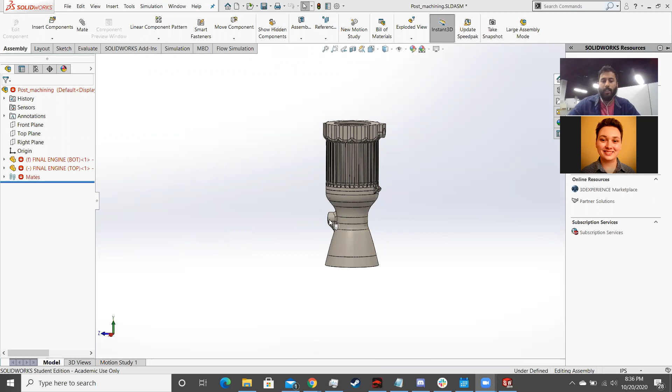Screen share that. So we're going to just run through how to do the most basic SolidWorks for the engines we're designing today. This is not what we're doing today. This is actually the regen engine itself. But eventually, in the next week or two, we're going to start getting to something that looks a little more like this with the nice nozzle curves and everything.

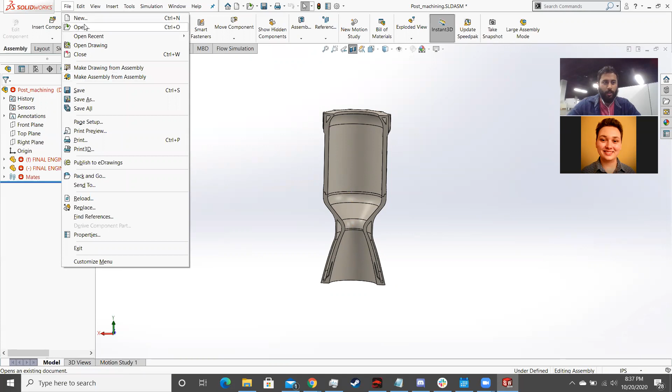But for today, what we're going to do is make a new part. So file, new part, all right. And hope that SolidWorks doesn't crash, because Zoom and SolidWorks running at the same time doesn't make this too happy. Close the other one.

First thing we're going to do is make a new sketch. Real quick, which units? I'm going to assume we're using meter, kilogram, second? Yes. Okay. And then dimension standard, just ANSI? Yep. Cool. Don't worry about it too much, because you can just type in whatever units you want, and it'll auto-convert. For example, I usually leave mine in IPS, inch pound seconds, just because it's easier to tell what's going on. But I'm going to put all my units in meters.

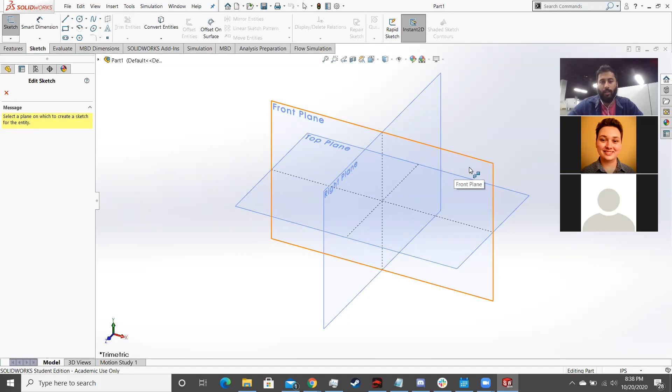So very first thing we're going to do is literally just draw a line here. We're going to click on that, say infinite line.

In case anybody knows the answer, is there a way to have SolidWorks not be awful on a second monitor? Nope. Gotcha. You can have two monitors running, but if you have it stretched between, like running on both monitors at once, it doesn't have a good time. Yes.

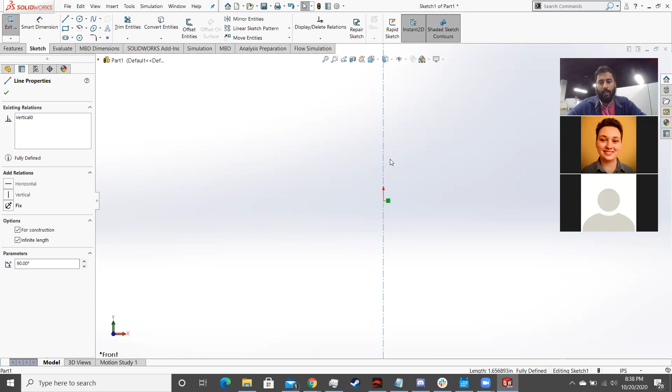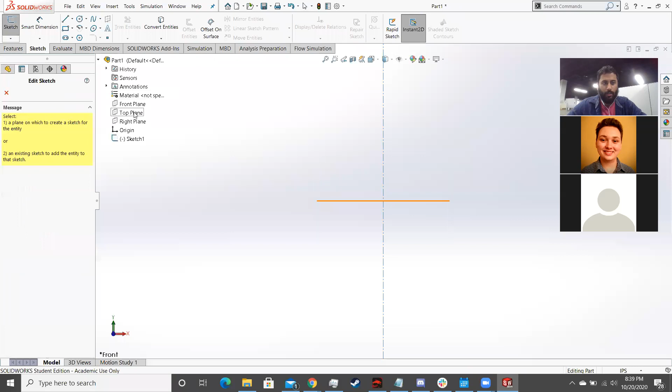Yeah, so first thing is just make an infinitely long line and have for construction checked off. Exit sketch, that's done. Then we are going to go back, make a new sketch again. It's going to ask us what we want to do it on. I'm going to drop down here, say the front plane again. What we're going to do now is kind of just blindly sketch something that looks like what the engine will look like, making sure it's kind of a closed body.

Now this looks nothing like what the engine will actually look like yet, but the kind of shape is there. I'm going to go in, make this be horizontal. Everything else kind of auto-completed to be the right vertical or horizontal. Before I go to actually set the radius on anything with length, I'm going to set the angle on the diverging section of the nozzle, which, as Jackson discussed last week, is going to be 15 degrees.

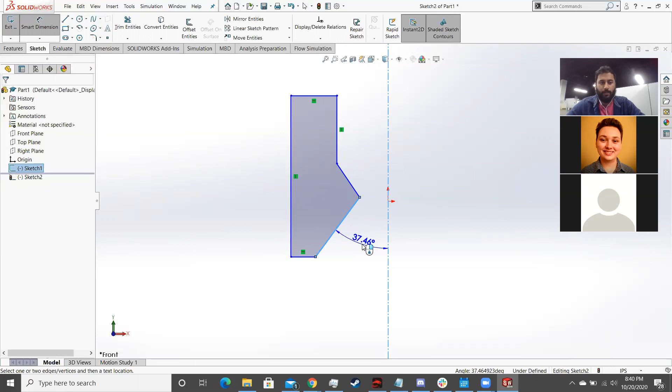So for this, I'm going to use the smart dimension and stretch it between the center line we drew on the other sketch and the diverging section line. Set that, just type in 15. It's going to screw up what this looks like right now, and that's fine. Then similarly for this section here, this angle can vary anywhere from 30 to 60 degrees away from the vertical.

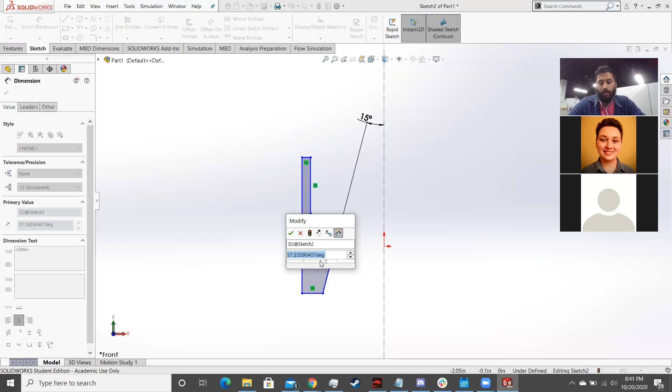Actually, I'm going to define that one a little differently. Yep. Sometimes it's hard to delete dimensions that get drawn. But same thing, I'm just going to go from here to here and pull it this way. As I said, this can be anywhere from about 30 to 60, 65 degrees. Generally, making it smaller is more conservative, but then your engine's longer and heavier. So I'm just going to kind of arbitrarily split the difference and say 45.

There's no great way to say what's best for this without doing a bunch of fluid simulations. So for what we're doing right now, I would just kind of pick a number and go with it. So, okay, we have our nozzle angles defined. Then the next big thing that we're going to do is actually input those radius numbers we pulled from CEA last week, which this is for the engine that Jackson and I designed.

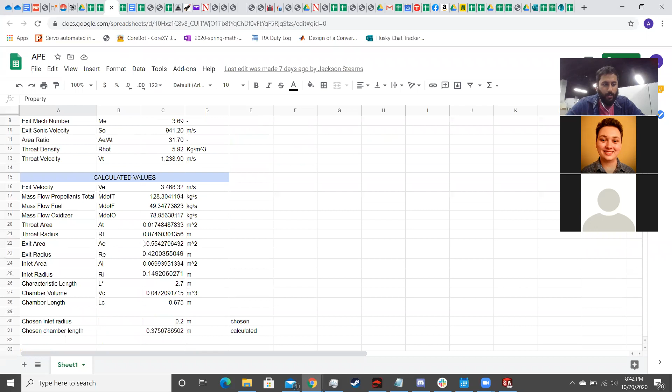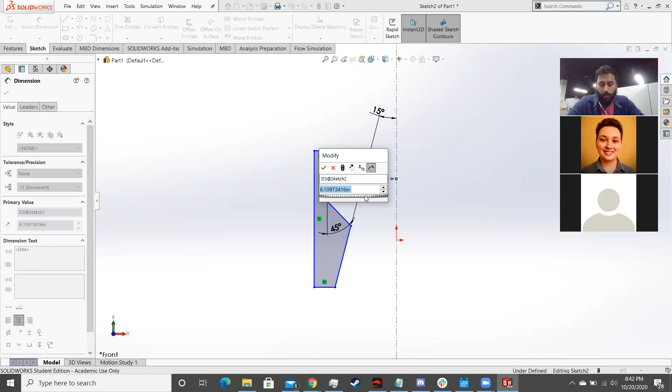We're going to start from the top just so that SolidWorks stays a little happier. And then inlet radius, it's right here. This would be what we calculated as the minimum, and here's our chosen. So I'm going to use this number, which is 0.2 meters. Because this is straight, I can just define this as the chamber. You can see that this is still in inches, which is bad, but I'm not going to change it right now. Instead, I can just type in 0.2 meters, and it will auto convert.

Next, I'm going to use the chamber length here. I'm just going to copy this. And that can be given by this length right here. This is all done with the Smart Dimension tool. Paste that in, type in meters, hit enter. Next thing, I need to find the exit radius, which is right here. Same thing, copy that. Then I need to pull this to this point here rather than to a line.

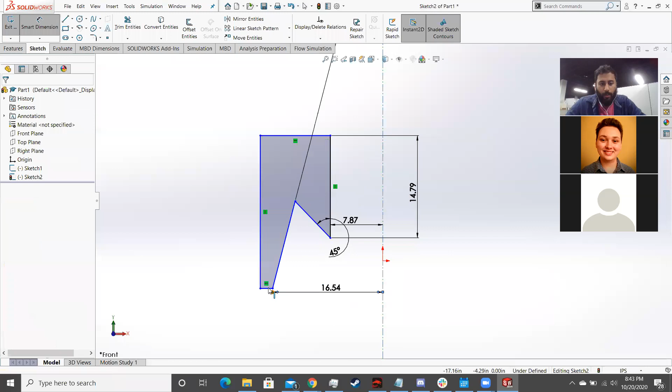As you can see, that broke absolutely everything. What I'm going to do is leave Smart Dimension. I'm just going to pull this down until it straightens itself back out. All right. So you can kind of see that the way these nozzles end up looking is your combustion chamber is kind of tiny, and then your nozzle is very large and long.

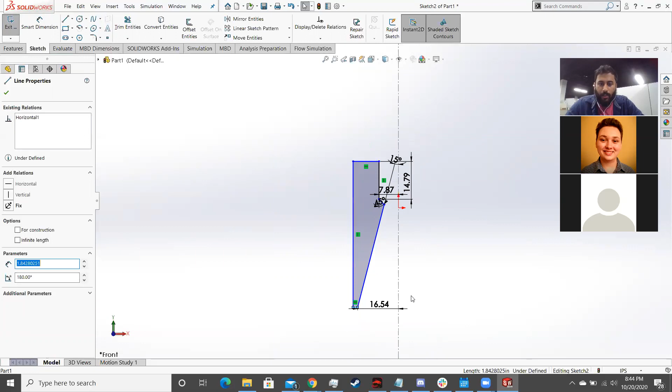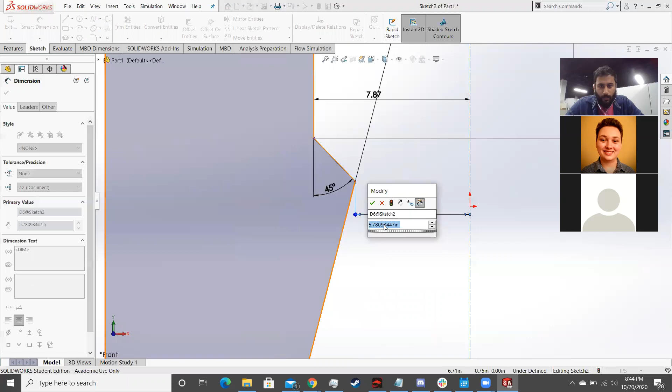The one thing I have not defined yet is the throat. And as a first thing, let me just do that real quick to this point. And I have that listed as this right here. Same thing, copy and paste that. There we go. So when everything is actually defined, all the lines at the edge of this will turn black. Right now, there's still things I can pull around and move.

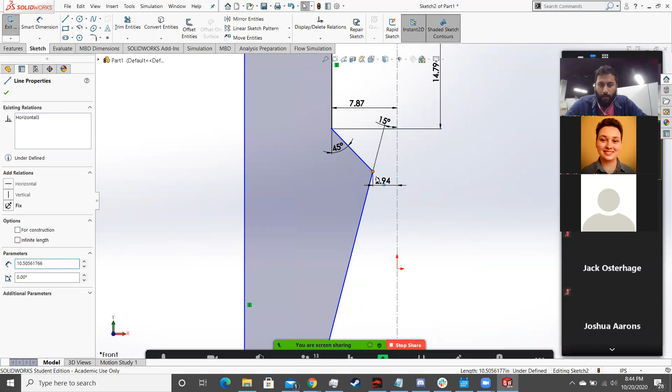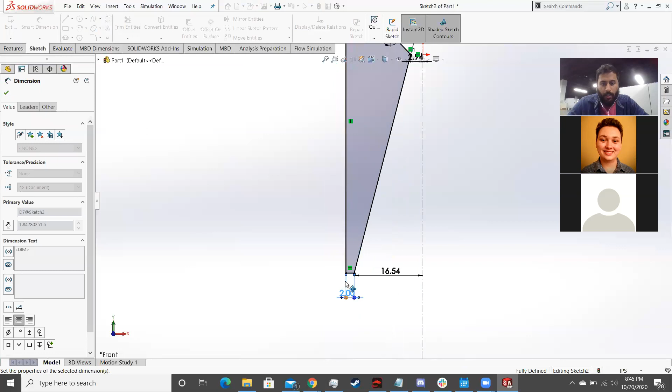So to make it better defined, which you don't absolutely have to do, it's just kind of good practice, I'm just gonna set that throat, not vertical, horizontal with the origin there. And I'm going to set this wall to be 2 inches thick. Why not? So that gives me the outer cross section of this engine at the moment.

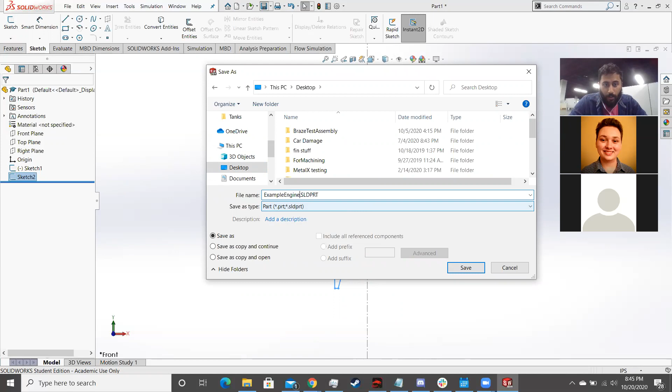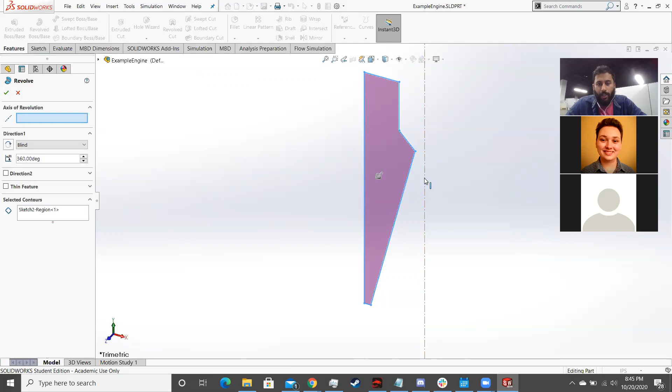Going to now exit sketch, save this. Save the file. Really should have done that before, but whatever. Now I'm going to go to features and hit Revolve Boss Base. Now it's going to select this region in selected contours and select the axis of revolution. We're going to select the one that we made in that first sketch, this infinitely long line.

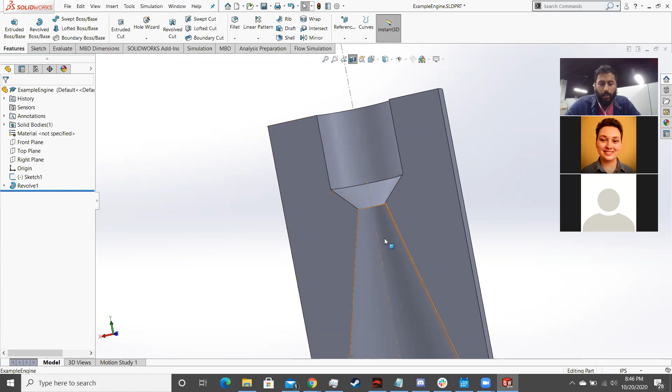And now it's going to just make a nice circle here. I'm going to go to a cross-section view. And there we go. So that's the basics of what this engine looks like right now. Obviously, we don't actually want these to be super sharp turns. It's not great for the flow. So we're going to go back in here. No, sorry, wrong sketch. I'm going to go back into this one.

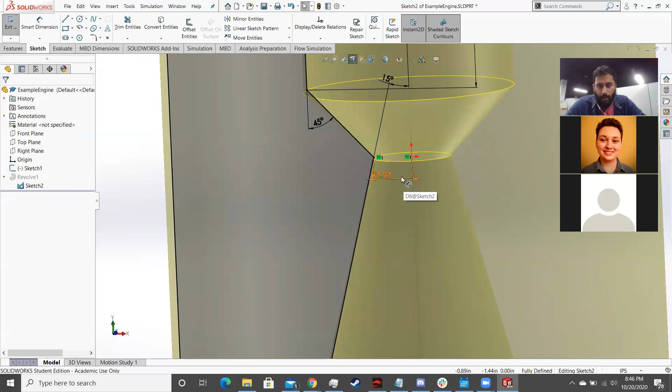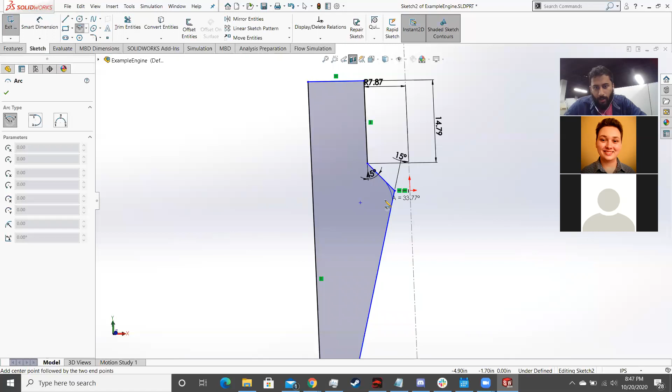And we're actually going to delete this. What we're going to do instead is draw an arc. I'm going to put the center just in an arbitrary spot over here. Stick it to this, again, in an arbitrary spot. Sometimes you gotta play with this a little bit to get it to cooperate. And then just stick this out here somewhere.

I'm gonna go in and add relations to each of these. So selected both of them, and I'm gonna say a tangent relation. So it's gonna force this arc to be tangent here. And then I'm going to select the other part of the nozzle and do the same thing. So now this is completely forced to be tangent.

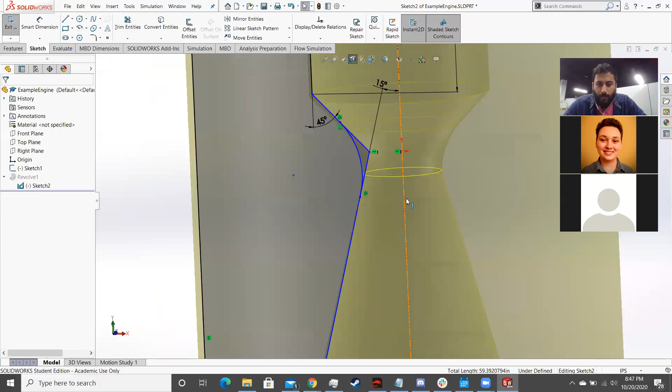This is gonna be a really stupid question because I followed you so far, but how do you pan? Oh, sorry. Yeah, you definitely want to have a mouse for this. A touchpad's not great. Okay, touchpad is very not great, cool. Because you want to hold down the mouse's middle button, and that'll let you rotate. And then scroll in and out is to zoom. Yeah, that makes sense. Okay, I'll find a mouse.

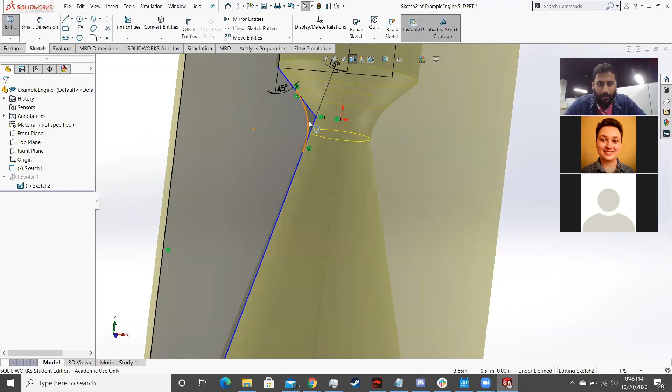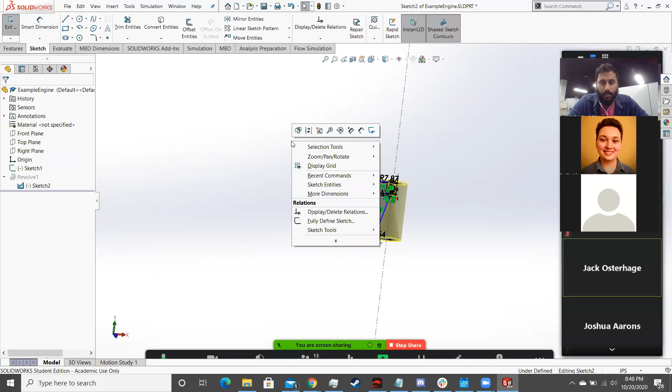You can do it with touchpad. If you do it with touchpad, you need to right click, and then you can, sorry, this is in a section view. I should turn off section view for this. You can right click and then select what you want. I found it. Yeah, it's just not a great time because you got to keep switching. Right. I found it, thank you. Yeah, so you can do it there.

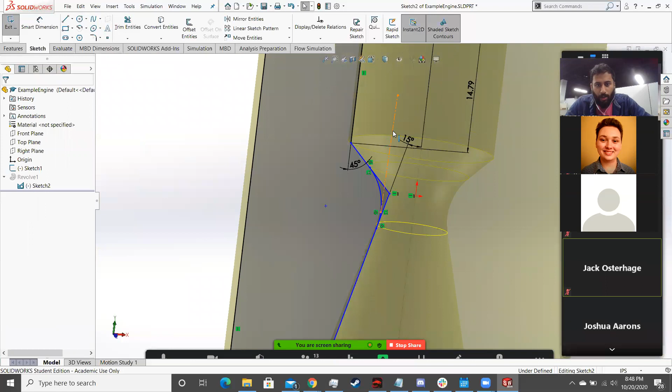So then you have this arc here. And what we're going to do is draw another line just off this at an arbitrary spot. We're also going to say for construction, infinite length, and vertical. And it snapped to create a tangent mate there, I think. Oh, I did it. Sorry. So it made a tangent mate for itself. If it hadn't, we would have done this and said be tangent.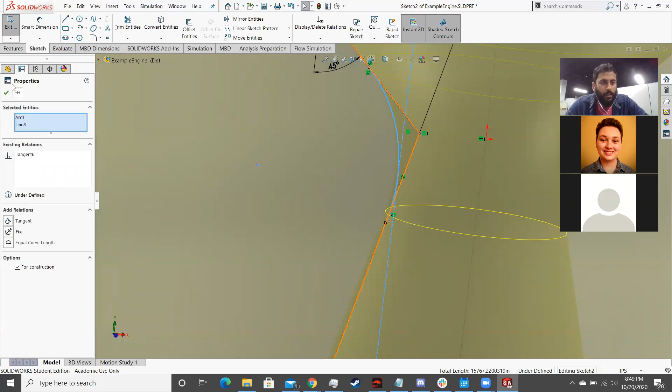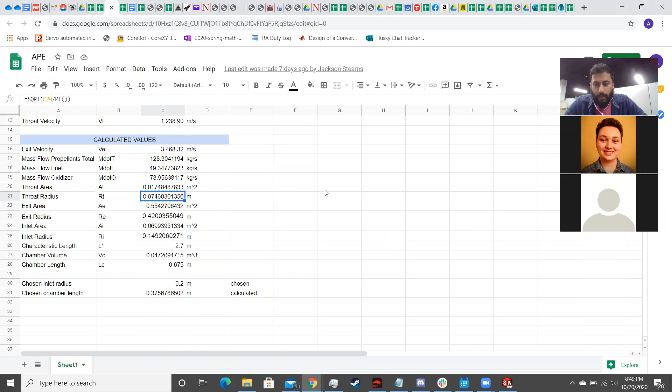This kind of gives you the location of closest approach to the center, which is also the same as your throat radius. So now what we're going to do is do that same dimensioning and copy in the throat radius. I copied.

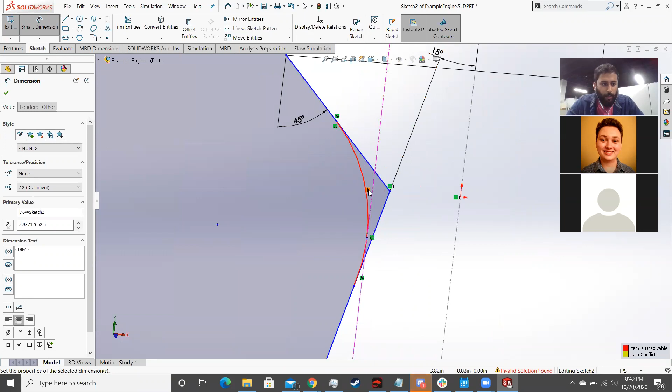Now this kind of broke everything. That's not completely unexpected, this will happen. See why you're angry... tangents, why are you angry?

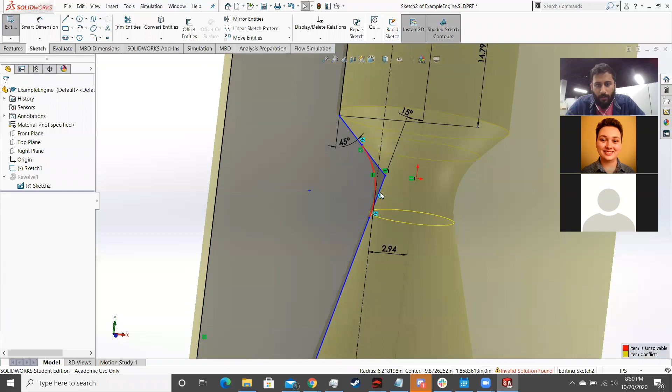Okay, I don't know why it's angry, but we're just going to say trim, and we're going to chop off these two sections, or three sections, and now it should be happy again.

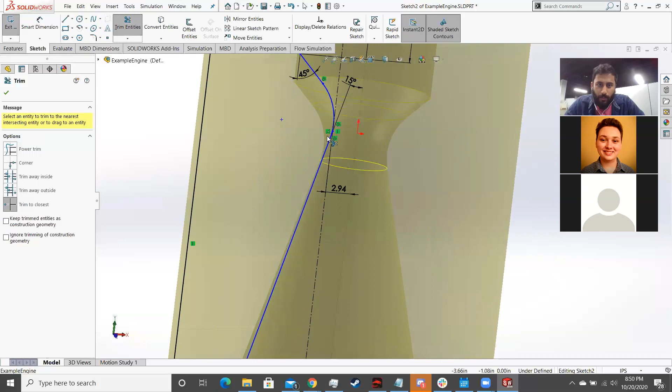So now we kind of have this nice curve going. Unfortunately, now it's angry with this because it managed to draw itself a line here. Stuff like this happens sometimes in SolidWorks, it's just stupid.

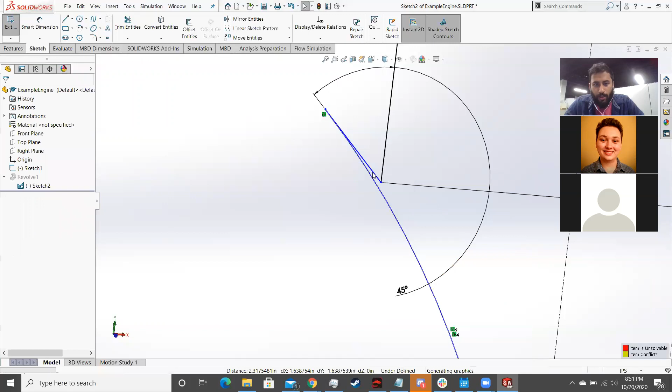We're just going to select those 2 points and say merge, and it's going to break. Okay, so let's keep that, and then merge those two that way. Now it's happy again. Oh, never mind, I see what happened.

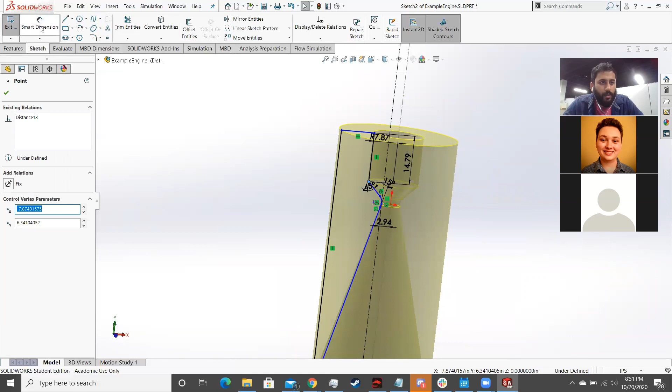This can move, which should not be possible. So we just need to set those 2 points to merge. No. All right, why SolidWorks?

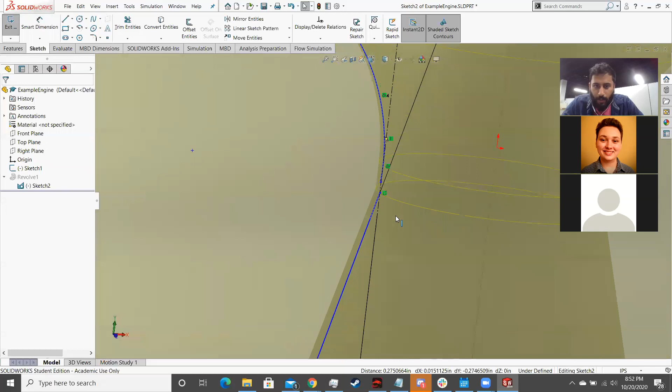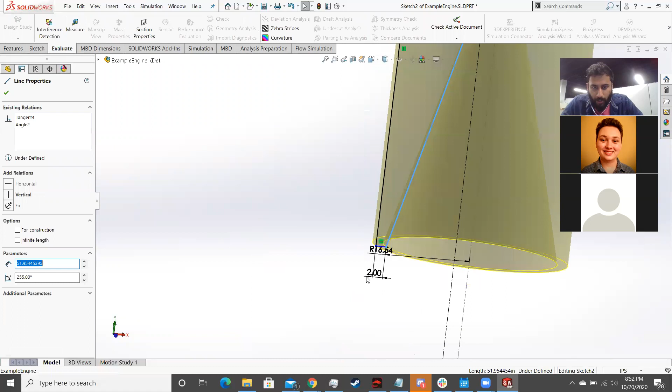Okay, there we go, now tangent. Something's still not completely defined, but I don't really care right now because it still looks right. And we have our exit radius, we have our inlet radius, and we have our throat radius here.

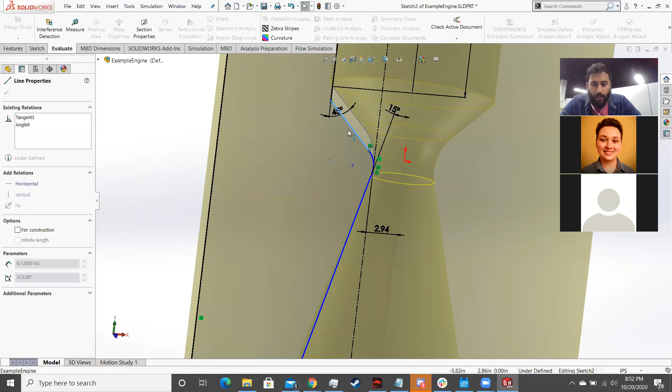You can usually tell what's not defined by pulling stuff around like this. And as you can see, this is changing the converging area, but it's not changing the exit area stuff. It doesn't matter a ton what the converging area looks like, it kind of comes back in.

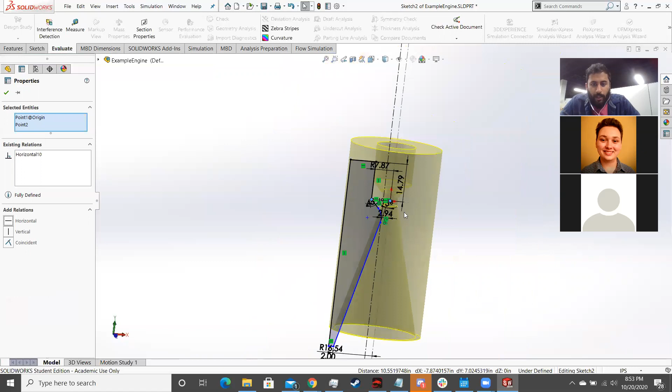That might be it. Yeah, there we go. So I just kind of put that there to define where it is relative to the origin. Doesn't matter really. Yeah, that's good enough for this right now.

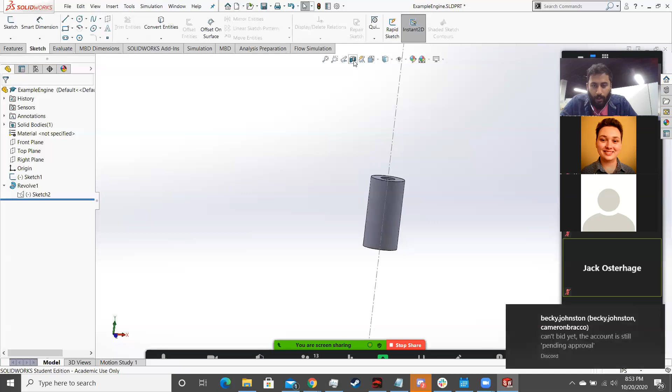We're going to exit sketch, and we're going to look at this again. So now we have a nice slope through the throat, which looks a bit better.

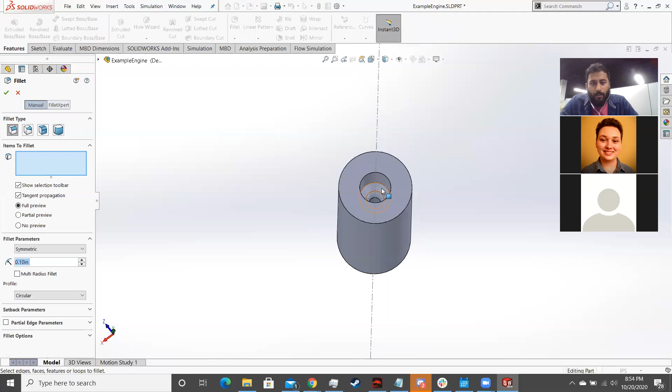Now what we're going to do is add a curve here. Generally doing what I did in the throat is not a great idea for adding curves because it's hard to change later. You're much better off adding a fillet feature outside of the sketch like this.

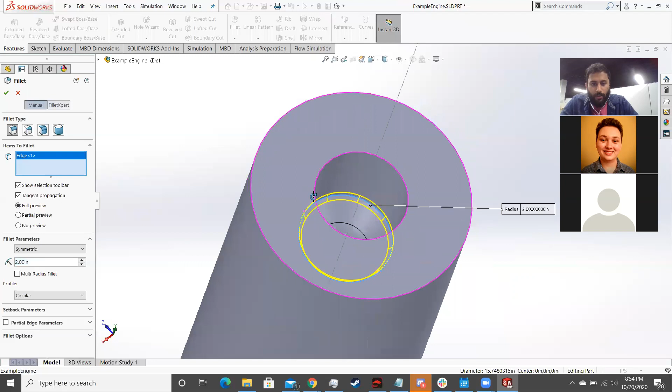This doesn't matter a ton what the radius is, so I'm just going to kind of arbitrarily say a 2-inch radius fillet on that curve. Let's check that off. And yeah, now we have a nice curve there too.

So this kind of gives you the basic geometry of the engine, where you have your chamber here, your nozzle throat, and then your nozzle exit. What we're going to do next week is take this and then convert it to actually the kind of swoopy curve that you saw on the regen engine when I pulled that up. Any questions on that?

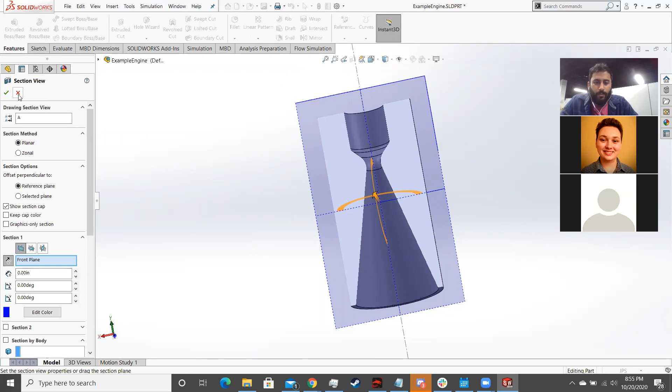Did you say it would be a bad idea to try and use fillets on the throat area for now? Yes, so the reason I didn't do the fillet in here is because it's hard to set this dimension accurately if you do. Because if you leave it as a sharp corner, then fillet away the corner, then you lose what the actual distance here is.

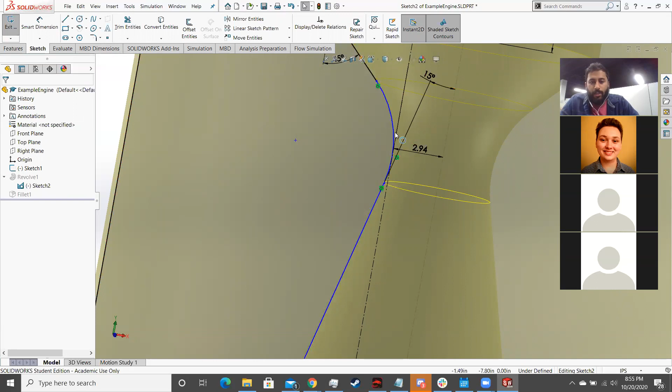Okay, got it, thank you. Yep. Generally doing this is a pain because now to change anything here, it'll break whatever I do, versus for the fillet I put on here, it'll just kind of auto update and be happy.

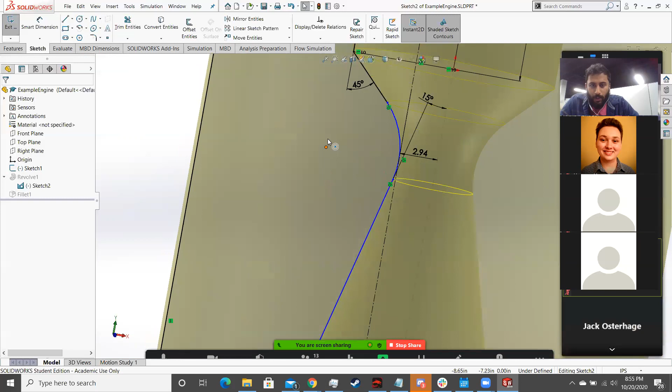Okay, that's what it is. Yeah, this is the dimension I forgot to define here. We'll get to this more next week, but this generally should be about 3 times your throat area, which I still have copied.

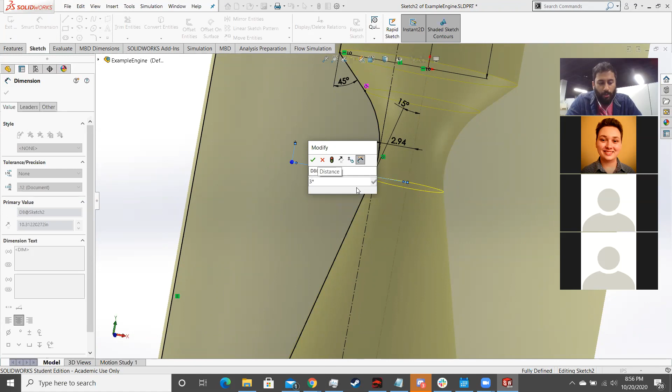And there we go, now it's happy. We're gonna exit that, and yeah.

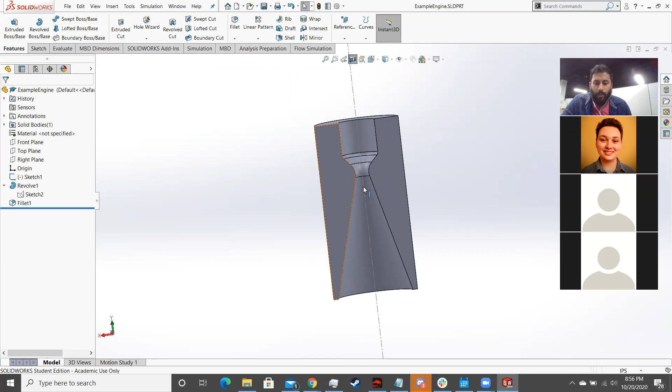Questions, comments, concerns? Is Thursday's meeting going to be dedicated to actually doing it for real this time? Basically, Thursday's meeting will be getting through the CEA, pulling the information from the CEA and getting everyone to this step. Oh, gotcha, okay, and then next week we'll be doing the...

Yeah, cool. The math involved in making the actual curve is decently complicated to go over why it needs to be that way. Yeah, you kind of lost me in the middle there. Not gonna lie. Yeah.

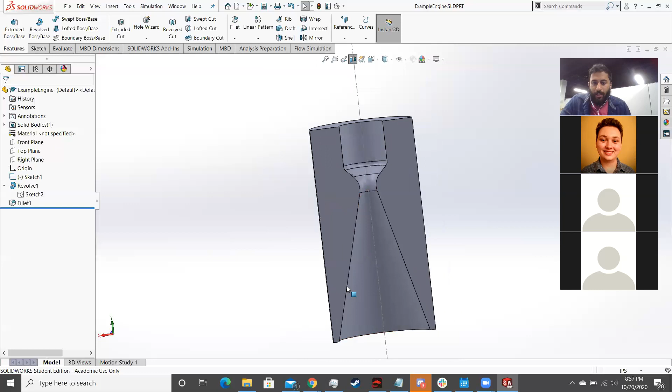Well, so the reason that this is a very basic nozzle is this is basically just what people have found works if you just keep it as like a cone. Next week we'll be making the parabola version of this, so that'll be kind of involved. So that'll be all of next week.

Right now, we just want to get everyone up to the same page of having this and being able to actually look at their engine.